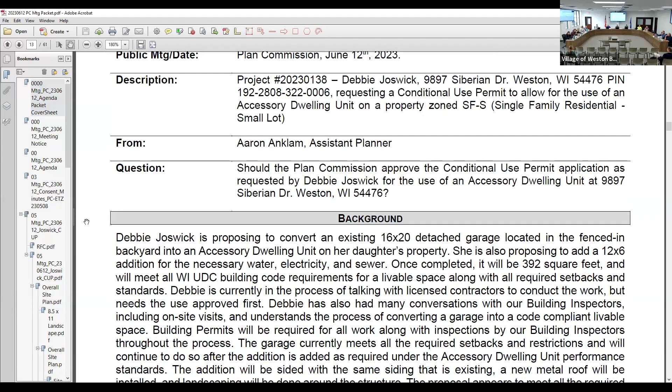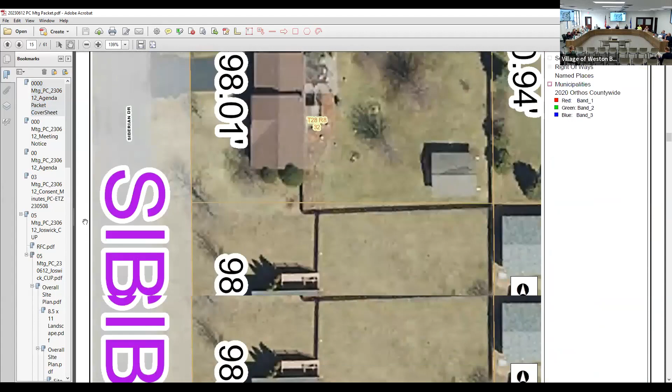I'll open the public hearing and presentation by applicant and/or staff. So Debbie's looking to convert an existing 16 by 20 detached garage. It's in the backyard of her daughter's property. There would be a 12 by 6 addition onto the front of it, which would remove the garage door. That's where the bathroom would essentially be. Debbie is here to answer any questions you may have.

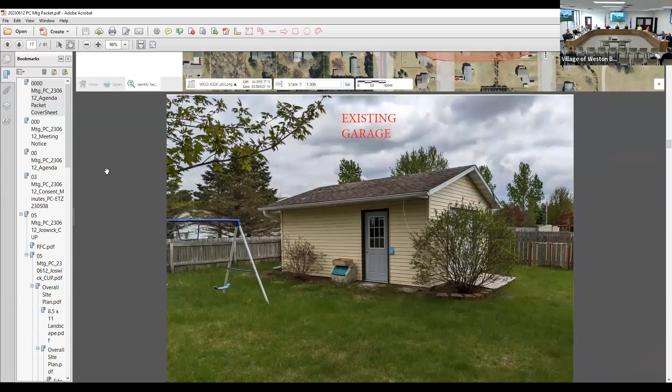Being a detached garage and it not being built to UDC standards for a livable structure, there's a lot of work that needs to go into it. She is aware of that, and she's had talks with our building inspectors and a lot of contractors regarding the work. A lot of building permits will be pulled and issued for this project, and that'll have Roman and Travis, our building inspectors, on site to ensure that the end product is indeed a UDC code compliant livable structure.

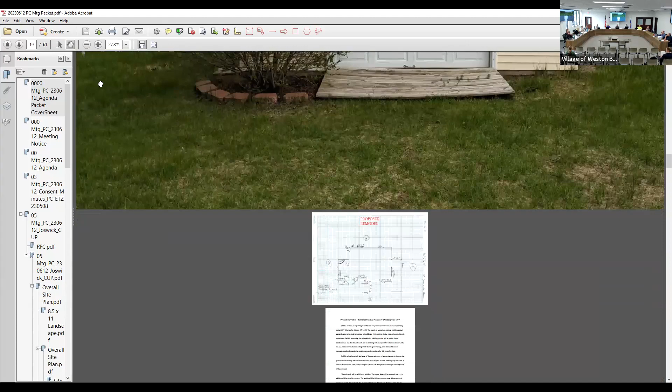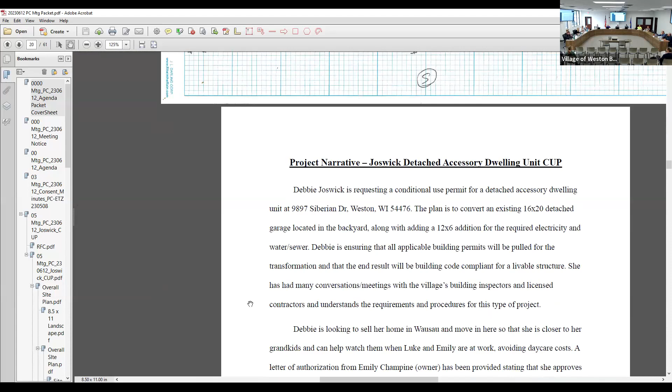She's just looking to be closer to the grandkids and help combat the cost of daycare. She is here if you have any further questions for her. Otherwise, I did include pretty much everything that was submitted in the packet, and the project narrative does go in depth about the performance standards and how it meets them. I did have Debbie answer the supplemental questions, which should also be attached in there.

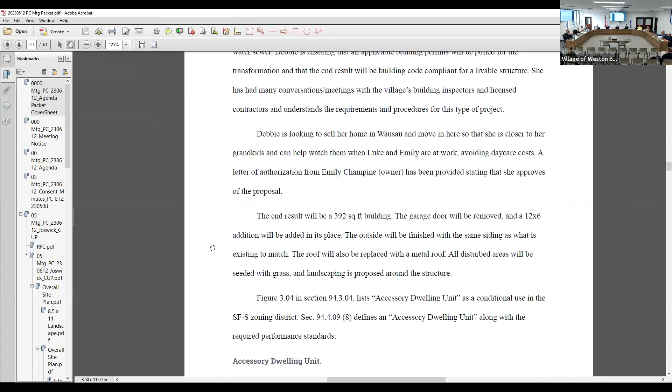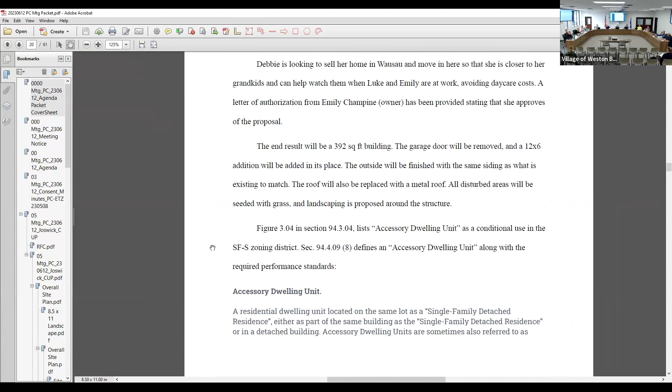Debbie, would you like to step up and add any comments to that? Just come up here with the microphone, you wouldn't mind stating your name and address?

That's okay. The one thing that I did just talk with Aaron about is on the front of the garage where the garage door was, I was going to bring a smaller roof out. But for more stability for the slab that's going in there for the bathroom, I'm going to add on to the existing roof with roof trusses so we can get adequate insulation up there also. So the drawing that I did for Aaron was a little off, but still the same footprint. It's the same thing, but it would be more structurally safe to have that come out from the roof.

And all that will be addressed when building permits are pulled. Yes, Roman and Travis will ensure that. I should also note, I didn't mention, but the current structure does meet the setbacks required by the performance standards. It needs to meet detached structure setback, so it'd be 6 feet from the rear there and 6 feet from the side, which it does, and that is shown on the site plan.

I guess I should note, I did have a neighbor reach out to me via email with some concerns, and I did carbon copy you guys in on it. So hopefully you had a chance to take a look at my responses and the questions that were brought up by Mr. Mike Murphy. And I did have one other phone call with another resident who wasn't in the same neighborhood, but he had some concerns about it becoming a future rental. That was something that Mike also brought up. So I did throw that in there as a recommended condition.

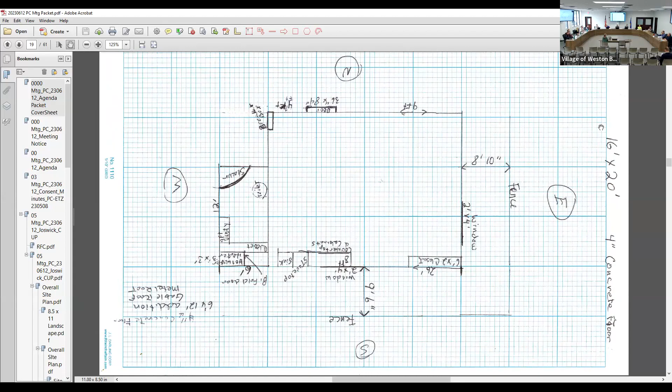Parking, I saw an overhead view. Looks like it must be an attached 2-car garage. Obviously you're probably not going to walk, right? So you've got a car somewhere that would park in the driveway? In the driveway. We have a gate that opens to the backyard. The whole backyard is fenced. It sure is, fully fenced in.

My question would come up with, you've got a slab on grade that's floating, and typically in house construction you have frost walls that eliminate any heaving or anything like that. I guess that would be a concern with bringing plumbing back there, because you've got a floating slab. That slab's going to move, so how are you going to control that? What construction are you going to do to shore that up?

So what we're going to do is actually attach that with rebar to the existing slab. And it's going to be a 10-inch deep slab, by 6 by, I believe it was 12. Roman would have the answer to that, I'm not sure off the top of my head.

You're talking about the existing slab though, right? Just the structure in general. I mean, we've got frost walls. We live in Wisconsin, stuff moves. And when you start bringing plumbing back there, whether it be water lines or sewer lines, if that slab's going to move—and all of our approaches that are pinned or slabs on frost walls down on the ground, that stuff still moves—so in my opinion, purely my opinion, if that's not some sort of frost wall or something, there's going to be a plumbing issue down the road, and it's going to happen.

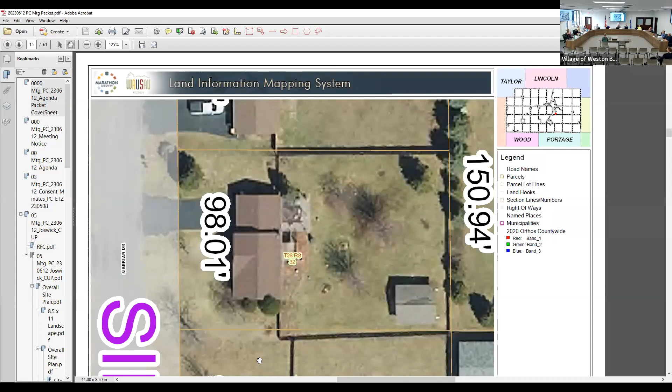I had a brief conversation with Roman here earlier today, and it does sound like this thing really does have to meet 2023 building code. So just like you're gonna build a new house, we've got to have R49 in the ceiling and R19 in the walls for insulation. You've got to have a vapor barrier under the slab.

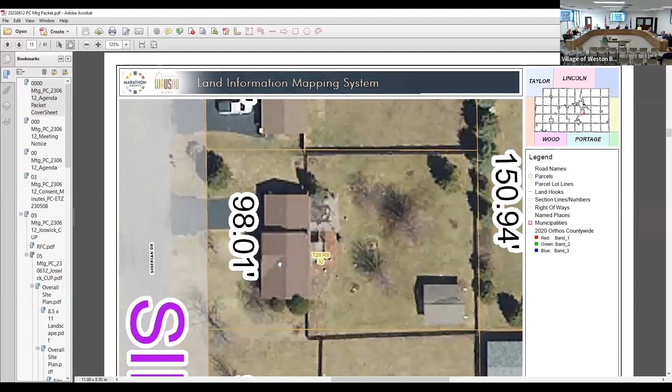And if you don't, then you've got to do a different outfit with the existing slab and changing roof lines and stuff. I just wonder if you're getting these bids and estimates to have this done, because you're not doing it yourself, right? Oh, God, no. Contracting it out. I'm getting estimates and they're all licensed, and I've already run them all through Roman, and he said, yep, that's good.

I'm just wondering if you may explore the idea—this is 392 square feet or whatever the number is—you may be more cost effective to knock this thing down and build a new one, slab on grade, or with a frost wall. If you've got to physically change everything that's there, all you're saving is 2x4s that you have to fur out to 2x6s to meet the insulation code. I don't know what you're saving by keeping that structure, but that's up to you.

That's not up to me, I'm not spending your money. But you may be more cost effective—I would explore that option. Again, the whole... I will talk to my contractor about that. That is a possibility. So again, the whole point of this is to determine if she can do it.

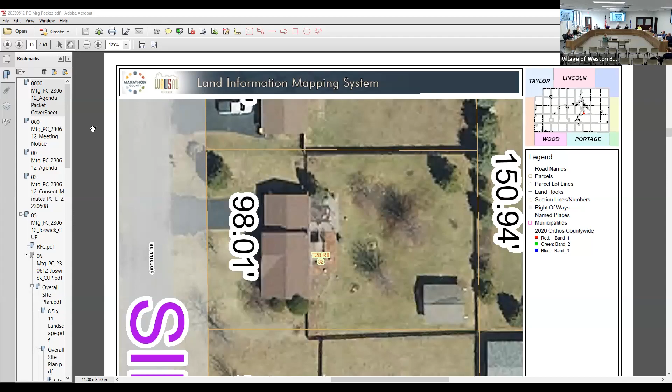And after that, correct. Yeah, it's gonna be up to our code guys or our building guys to inspect all that.

As long as it meets building code, I'm not opposed to it. I don't think there's a problem. I wouldn't want to see people living in there now—there's spiders out there.

All right, so we'll move along here. Public comment period, if nothing else for Debbie specifically. Is there anybody online or in the audience that wishes to make a comment on this? Second time, anybody online or in the audience that wishes to make a comment? Everyone can get their hand up. Nobody online or in the audience that wishes to make a comment? Hearing none, I'll close the public hearing.

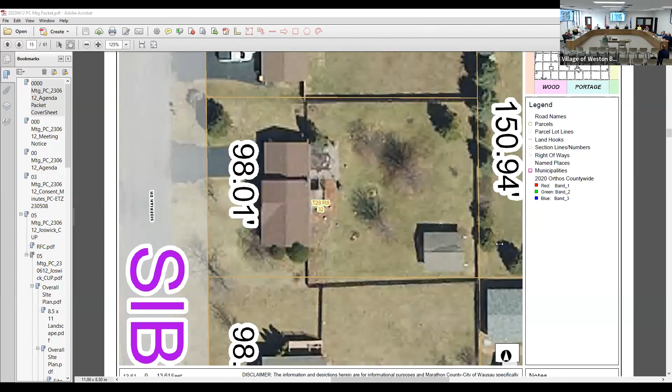Recommendation from staff. Staff recommends approval of the conditional use permit with the following conditions. Okay, and discussion and action by the plan commission. What's your pleasure? We do.

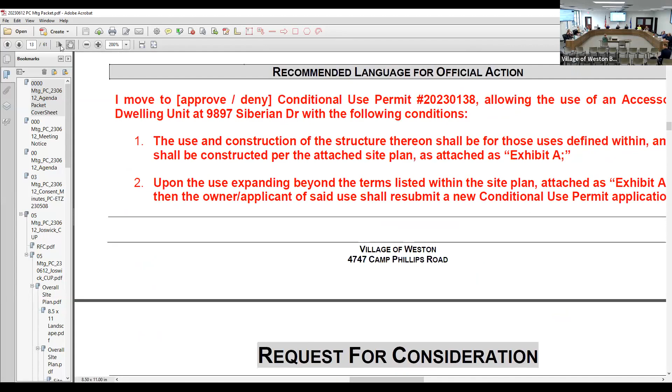I don't know if there was any further discussion that needed to take place before that, or we did move forward with that. Okay.

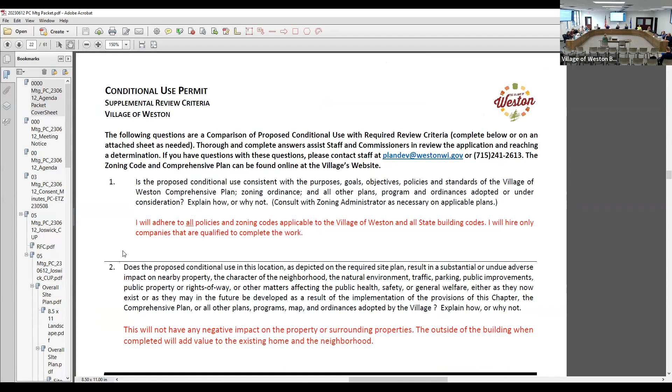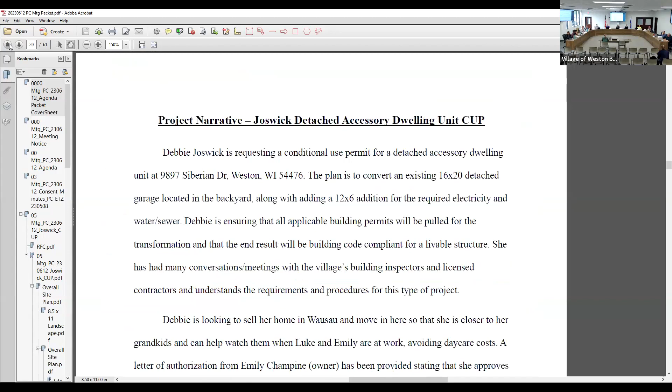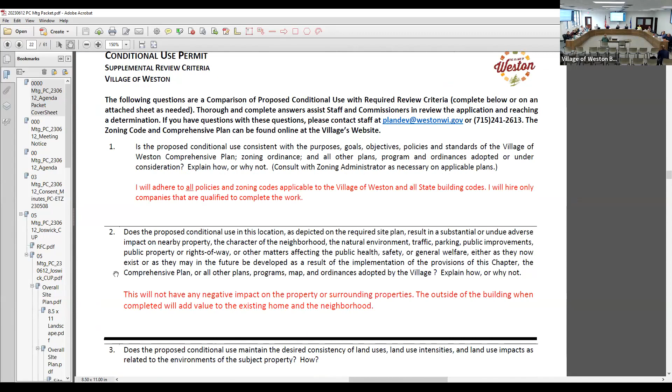Determination number 1: is the proposed conditional use consistent with the comprehensive plan, this chapter, and all other plans, programs and ordinances? Yes. Item number 2: the proposed conditional use in its proposed location and as depicted on the required site plan will not result in a substantial or undue adverse impact on nearby property, the neighborhood, environmental factors, traffic factors, parking, public improvements, public property, or rights of way, or other matters affecting the public health, safety, or general welfare, either as they now exist or as they may in the future be developed as a result of the implementation of the provisions of this chapter, the comprehensive plan, or all other plans, programs, and ordinances adopted by the village.

Yes. Does the proposed conditional use maintain the desired consistency of land uses, land use intensities, and land use impacts as related to the environs of the subject property?

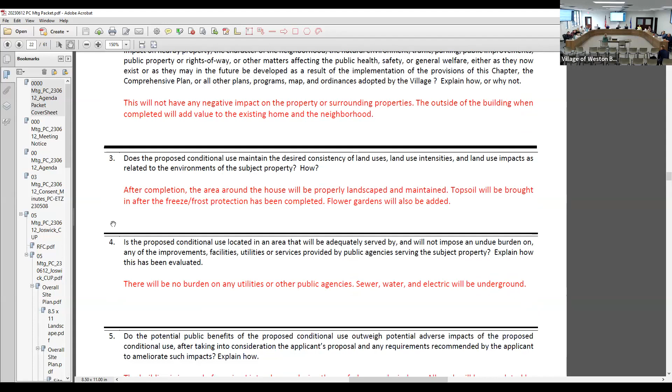Yes. Is the proposed conditional use located in an area that will be adequately served by and will not impose an undue burden on any of the improvements, facilities, utilities, or services provided by public agencies serving the subject property?

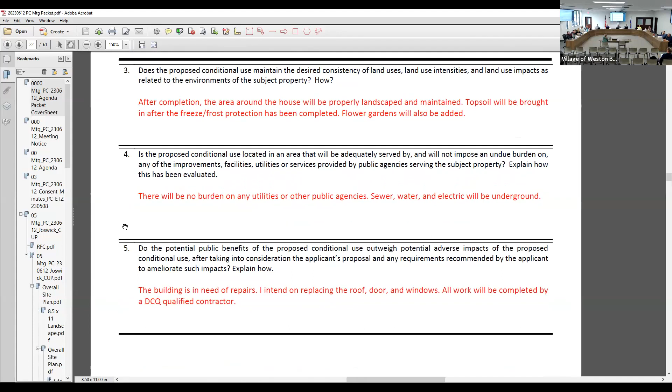Yes. Do the potential public benefits of the proposed conditional use outweigh potential adverse impacts of the proposed conditional use after taking into consideration the applicant's proposal and any requirements recommended by the applicant to ameliorate such impacts? Yes. I'll entertain a motion.

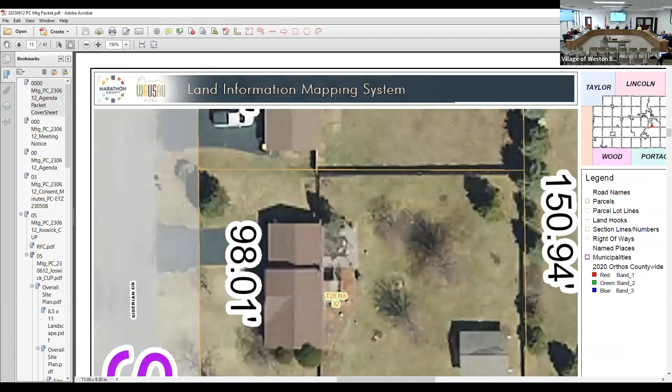I make a motion that we approve this as presented with the caveat of the staff, in particular making sure that all things are up to code and up to specs. I'll second.

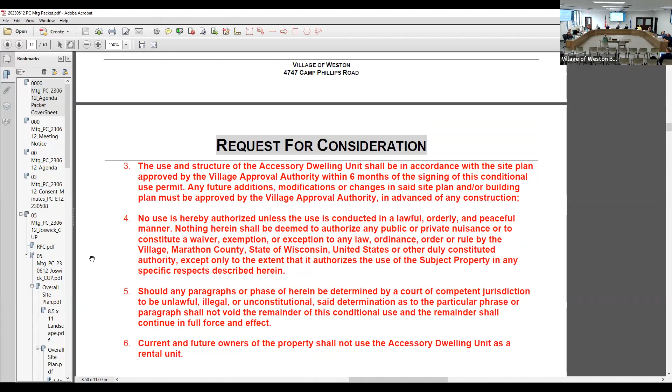There were a number of different conditions added to this. Do we want to include any of those in the motion? I recommend it to be included. Make that motion then that they be included, please.

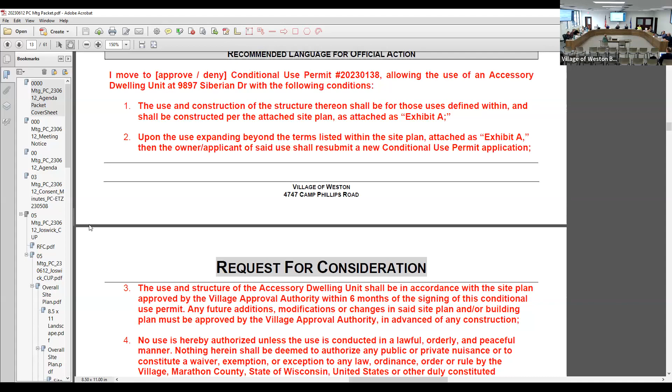Seconding the amendment. Dave, we're amending your motion. For clarification, do you want to include all of the conditions listed by staff? I think we should, yes.

Voting on the amendment, motion by Deason, second by Pincinot. All those in favor signify by saying aye. Aye. Opposed? So carried.

Now voting on the motion with the amendment. Motion made by Deason, second by Jordan. All those in favor signify by saying aye. Aye. Opposed? So carried.

Is that easy? All good to go. Let's go get some supper. All right, I will be in touch with Roman. We'll figure out the concrete thing. Thank you, Debbie.

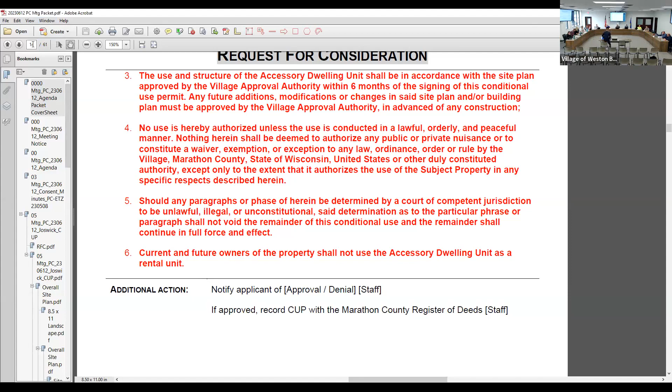Item number 6, project number 2023-0040, Project Timberwolf, 7007 County Road J. Conditional use permit request for the temporary use of a relocatable building to allow for operations while the distribution center is being constructed. I'll open the public hearing.

Presentation by applicant and or staff. Take it away. Michael's going to pull up a quick presentation with a little more detail than what you've seen in the packet, hopefully clearing up anything.

Hi, Greg Koziel, Ambrose Property Group, 888 Keystone Crossing, Indianapolis, Indiana. Here to talk to you about the conditional use permit request for early deployment operations on Project Timberwolf, located at 7007 County Road J, Weston, Wisconsin.

I wanted to talk specifically about the permitting request, the discussions we've had with staff already, and what we're trying to achieve. We'll go through the conditional use request, a summary of what we're trying to achieve, and the proposed design. It's still in flux, but right now we're just requesting use on site.

For an overview of what we've discussed in previous months, we're proposing the current development as shown here: 16.58 acres, a 79,000 square foot facility including auto, van, and trailer parking, and a private access road. That's what we're showing here on Christie Lane. It won't specifically be called Christie Lane, but it's a private access to the facility for trailer traffic.

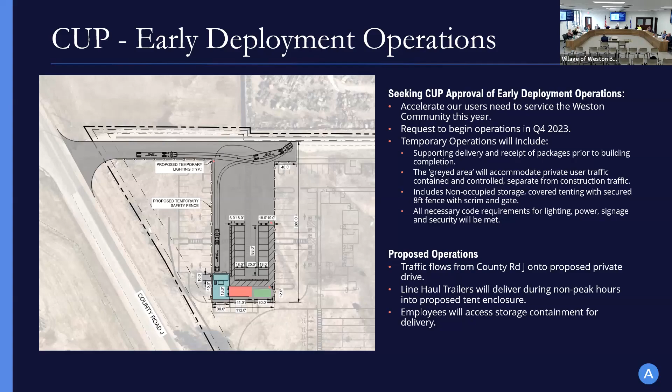On the next slide, in more detail, this shows a different view of what we're proposing. In the greyed area, the top right corner has temporary facilities for employees, storage containers just below to the right, and a tented area that backs up to the trailer line hauls—so it's a fully serviced operation with non-occupied storage, and those parking areas will be for flex delivery, all surrounded by an 8-foot fence bordered right there.

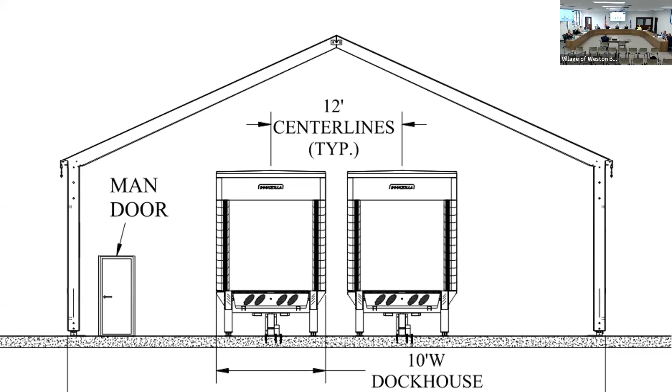This is the tented in area. I'll show on the next slide, it kind of shows an image of what this could look like. Oh, I went ahead of myself.

This is not exactly what it would look like, but very similar to what the vendor has provided in the past. You'll see a line haul backed up to a staged dock that's 4 or 5 feet off the ground, with a ladder and some conveyance coming off that.

The request today, I know we saw staff's review, and we appreciate their review ahead of time. We're asking for the temporary use permit to be in place 120 days after the building is complete. Just due to the operations of the user, it's not a seamless process. We'll want that permit in place while they get the building up and running, and then we dismantle the operations and finish the site. There's kind of an overlap there.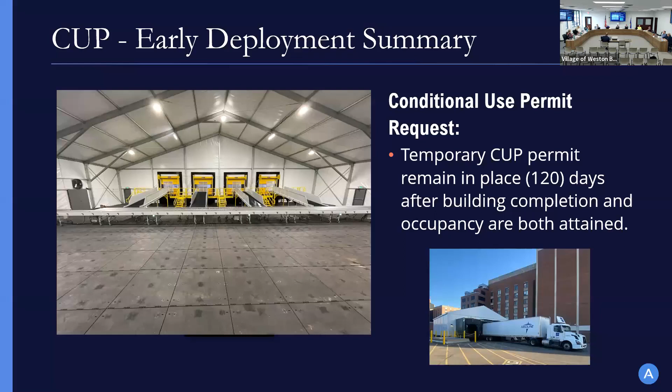Well, you kept talking about an 8-foot fence, but you really don't know where that's going to go because of the wetland DNR. Oh, happy to discuss that.

The wetlands are on the southern portion of our site, the southern and eastern portion. So that has been delineated. It has been, yeah, we got that. That was one of the things I passed out. We just got a copy of that. So...

We had Star Environmental provide the delineation on June 1st. That has been delayed just due to the spring being so cold. So we've gotten that pushed forward, and that has not really changed too much of our site plan. It may alter some of the spacing of our southern van parking, and we'll work through that and get you those details when that happens, but nothing on the north side. So wetlands, this is ideally where it's going to be placed, as it provides less conflict with the construction of our site.

And as you see, we've done a lot of utility coordination and stormwater coordination to date in those blue and green highlighted areas. This would anticipate if the main construction is hopefully completed Q4 of 24, this would be here 120 days, so until Q1 of 25, or until the beginning of Q2 of 25. The most we would ask for by the end of 24. So, I think we're trying to pull up the building completion date, but by the end of 2024, we would ask that we wouldn't need it anymore.

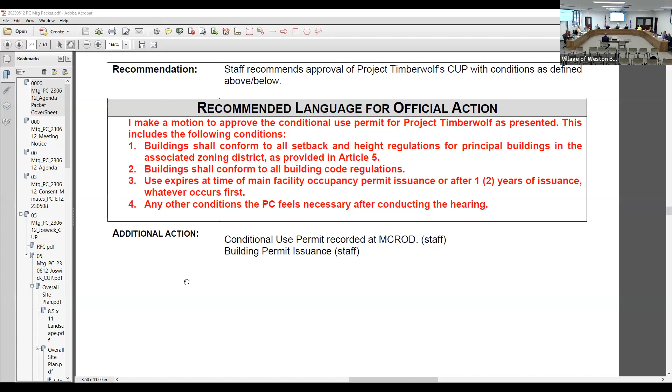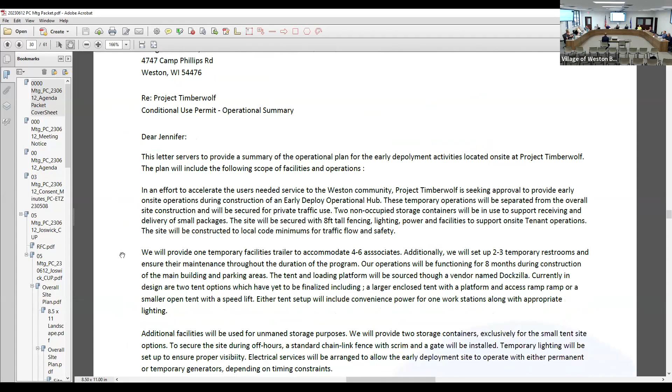It's up to you guys. For a relocatable building, we probably wouldn't have one, it would just get the temporary use permit, that's what we're gonna issue. And this isn't a standard issue tent, right? This is one of those prefab structures, it's a big structure tent.

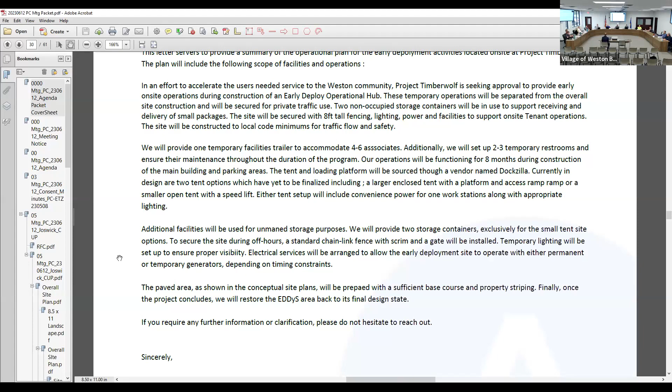It would get issued a temporary use permit and it would be tied to the conditional use permit. So your deadlines, whatever you decide to put on there. The only thing that would matter to me is a time contingency, that you do in fact follow through and get this done in a timely manner.

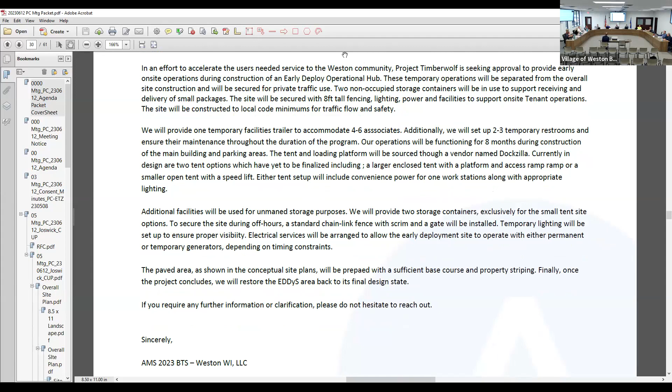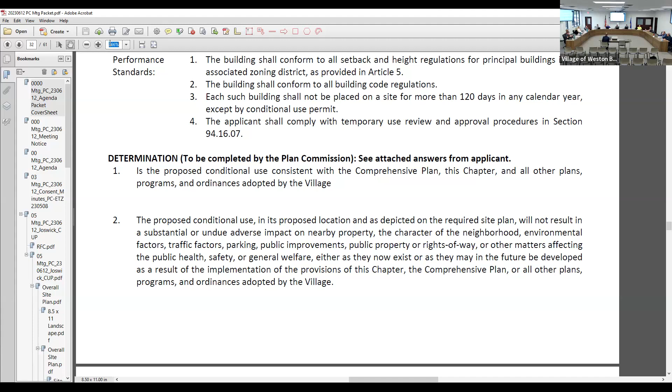Yeah, it's Ambrose's goal to get the building up and operational by 2024. That's our main goal. This temporary structure is something our users asked for, but we're gonna achieve that goal in 2024 and then get this dismantled and the building operational as soon as possible.

And if everything that you've said falls into place, you've got the final course on the parking lots and all of that lined up for when spring breaks. I think it would be somewhere in June, if not sooner. Yeah, I think mid-May would be the last few things we wrap up on the site. I'm hoping to get the building up and operational.

Stored with user packages and things like that, just for their use. So that timing is still being worked out, but as soon as asphalt plants open up, we're looking to shut that down and get the building up and operational.

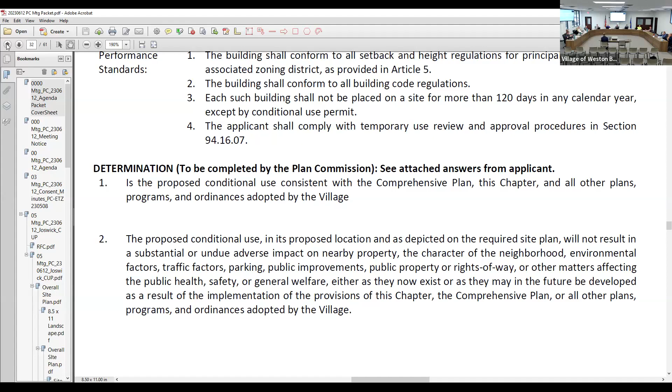Get any construction delays? Does 2 years give you adequate time to complete? That's why we have that overlap, just in case. That's what we're thinking through as we work through this. This is something new, so just having a little cushion for us, and that permit doesn't go away once we get occupancy. So we're hoping we don't run into delays, but we know it could happen.

So I have a question. If this is going to be asphalted over the area for your stormwater management, how do you propose to do that? Just to the left on the plan, if we could pull that up again, I could show it.

The blue area in the box is the stormwater area, so it's unaffected as of now. We're going to try and get everything piped in as we can. That has a lead time of 12 to 16 weeks once we get something from ADS. So we're trying to avoid the site where it's unaffected, for the early deployment.

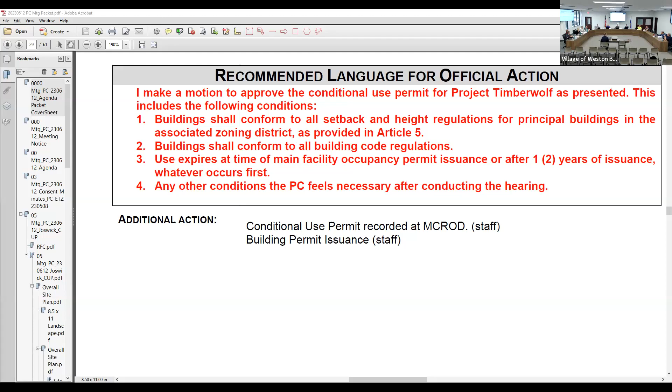So you're able to, that's what the question is—so that stormwater is between there and the road, the contact system? Yes. That'll go in before this fall. It will go in before this fall, but okay.

I think that we will, and I'll work with my contractors on this, we'll get this operational before then, or right around the same time period. If we need to, this could have a 20-week lead time, so it's just dependent on that.

Yeah, because I'm assuming that's the first thing DNR wants, the stormwater management in place before you start. Yeah, which we just received the plans today, so Michael will look at them, and then they've gone to the DNR too, so the stormwater management plans are fine.

It's just a matter of if they're able to get to the contact system before the building started, or if they have to disrupt, when your semi-traffic is going to run piping across to get to the contact system, because that's not a small task either. No, it's not. This was the attempt to do that coordination here.

So we're still working out the final design of the stormwater, which was recently done. So this is kind of the proposed area. That's something we're obviously working through—we're trying to avoid it. We need that private drive done, and we need the utilities not to conflict with that area as well. So we're out of it by November. We're not going in that red area.

Good call. Ready to do the determination? Anybody got anything else? No?

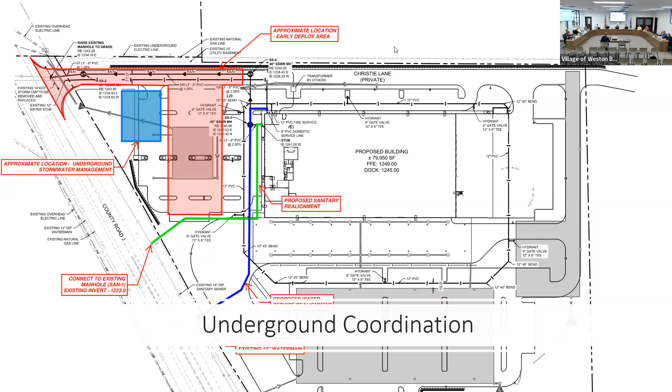All right, number one: is the proposed conditional use consistent with the comprehensive plan, this chapter, and all other plans, programs, and ordinances adopted by the village? Yes. Yes.

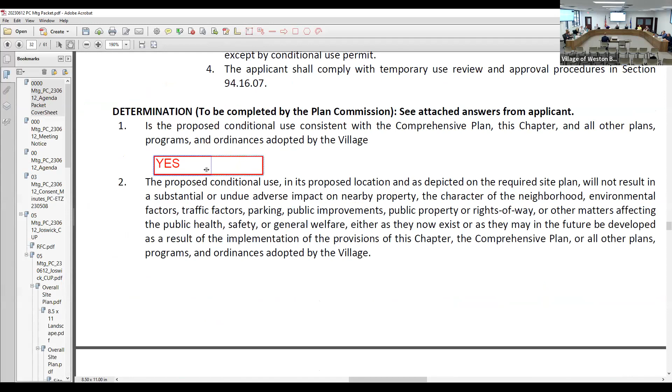The proposed conditional use in its proposed location and as depicted on the required site plan will not result in a substantial or undue adverse impact on nearby property, the character of the neighborhood, environmental factors, traffic factors, parking, public improvements, public property, or rights of way, or other matters affecting the public health, safety, or general welfare, either as they now exist or as they may in the future be developed as a result of the implementation of the provisions of this chapter, the comprehensive plan, or all other plans, programs, and ordinances adopted by the village. Yes. Yes.

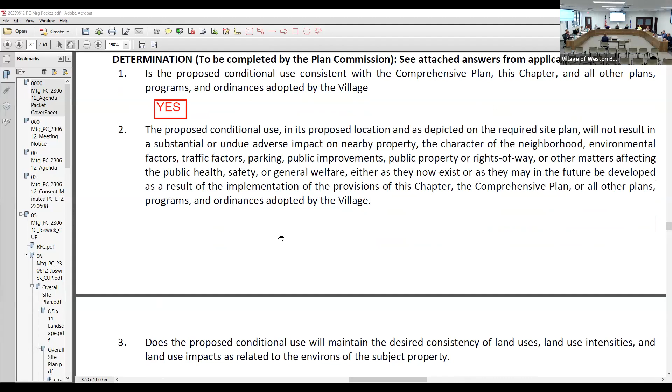Does the proposed conditional use maintain the desired consistency of land uses, land use intensities, and land use impacts as related to the environs of the subject property? Yes. Yes. Is the proposed conditional use located in an area that will be adequately served by and will not impose an undue burden on any of the improvements, facilities, utilities, or services provided by public agencies serving the subject property?

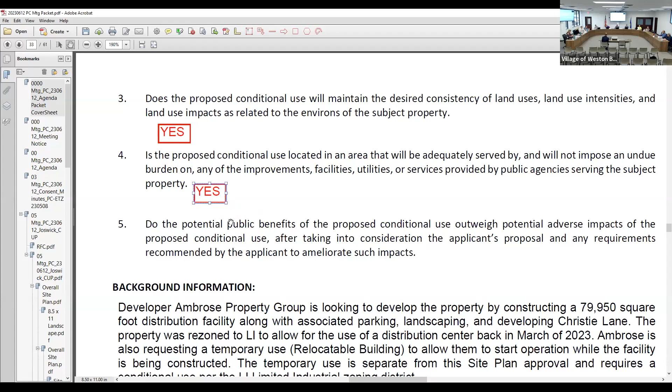Yes. Do the potential public benefits of the proposed conditional use outweigh potential adverse impacts of the proposed conditional use after taking into consideration the applicant's proposal and any requirements recommended by the applicant to ameliorate such impacts? Yes. Yes. I'll entertain a motion.

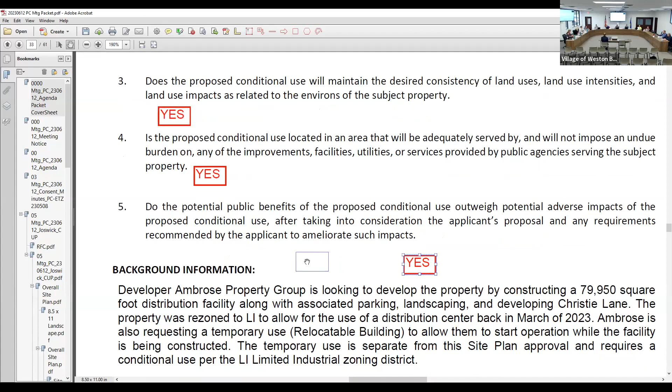I move to approve the conditional use permit for Project Timberwolf as presented, including conditions 1, 2, and 4, and a modification to condition 3 to state that it expires 120 days after main facility occupancy permit issuance.

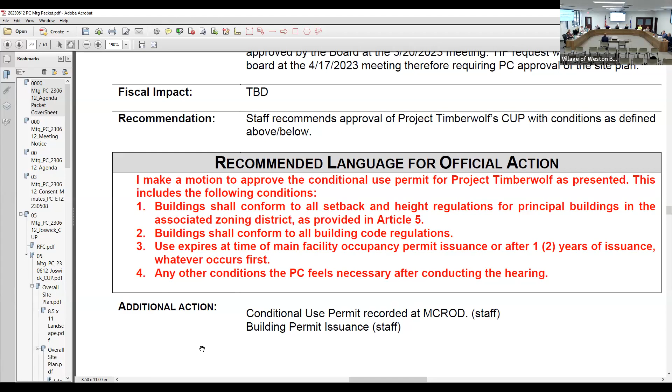Second. Motion by Mumper, second by Deason. On the question? Hearing none, all those in favor signify by saying aye. Aye. Aye. Opposed? So carried.

Was a very well worded motion. Way to go, Roy.

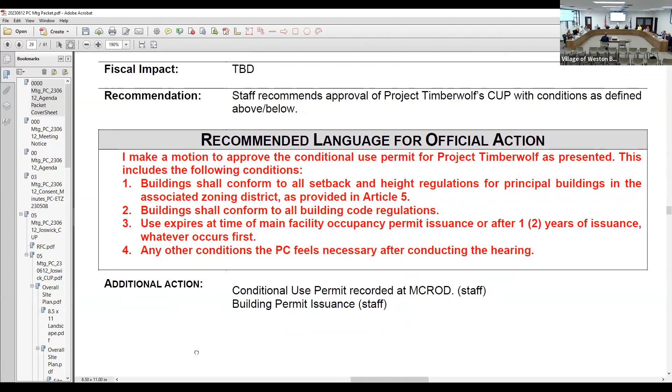Great. Thank you very much. Thank you.

Are you hanging around for the next agenda item? Okay, I'm just making sure. Did not, this one again, so, yeah. Yeah, you can stay up there if you want. The clock's still running.

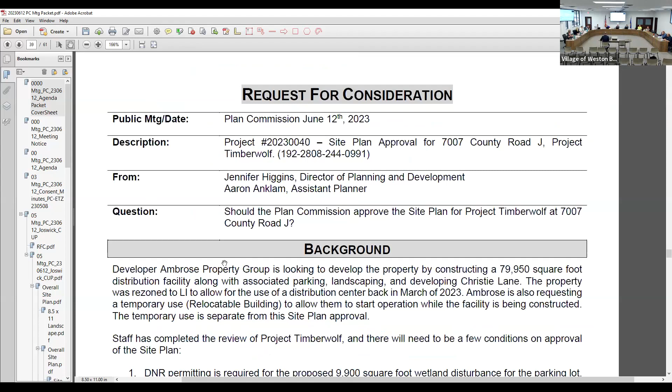Great. New business, project number 20230040, site plan approval for Project Timberwolf, 7007 County Road J, Weston, Wisconsin 54476, pin number 192-2808-244-0991.

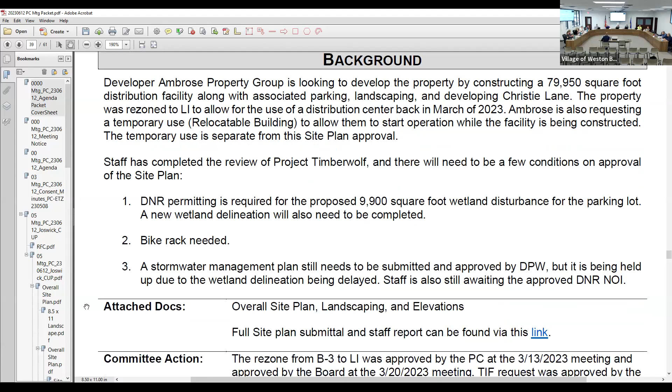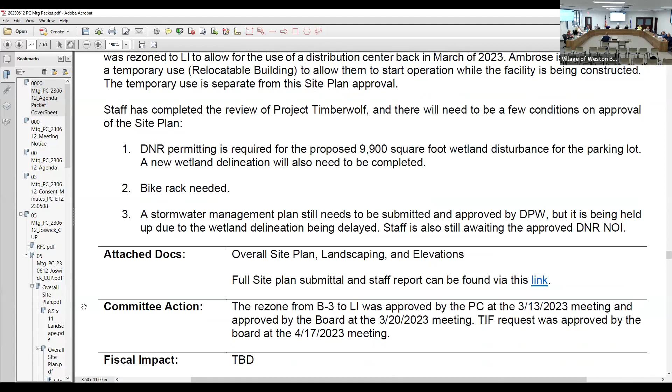So this comes to Plan Commission because the board has authorized the use of TIF assistance for this project. So you guys get to review, and you're the site plan approval authority. There are a few items still hanging out there, but we wanted to get it in front of you because for the main part it's your overall look of the building, site layout, things like that. We don't think a whole lot of it's gonna change except maybe a little bit of the parking area, like Greg said, due to the wetlands and any remediation they may have to take.

We could bring that back later. We just didn't want to hold up the project and wanted to get it in front of you because we had the majority of it basically fleshed out as staff.

So there were a few items still hanging out there that we've actually received since then. I did give you a copy of the document. We did get the wetland delineation, and in there was a document from the DNR stating that they basically had approvals to move forward at the village level, but they still needed to go through their permitting. So they will still have to do the permitting with the DNR for the project.

One thing we should probably discuss is the need for a bike rack. The code requires it. I don't think they need as many as the code would require, so I'm just suggesting they have something for somebody to ride there. Maybe one or two.

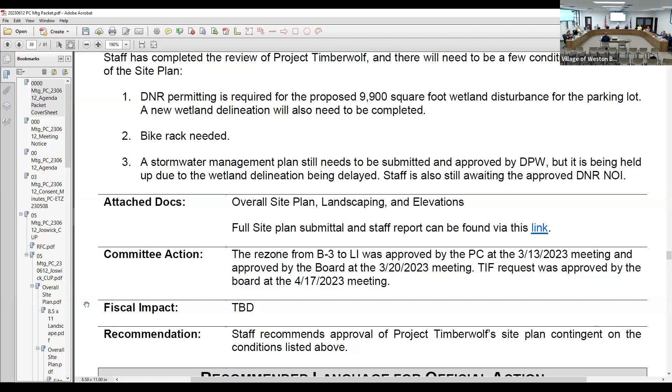At the time that I wrote this, we did not have the stormwater management plan yet. That did come in today. And then we would still need the NOI from the DNR when they get that. What was that last one? It's a notice of intent - it's the DNR's approval of their stormwater plan. Michael has not seen it, I just got it this afternoon, so he'll have to review that.

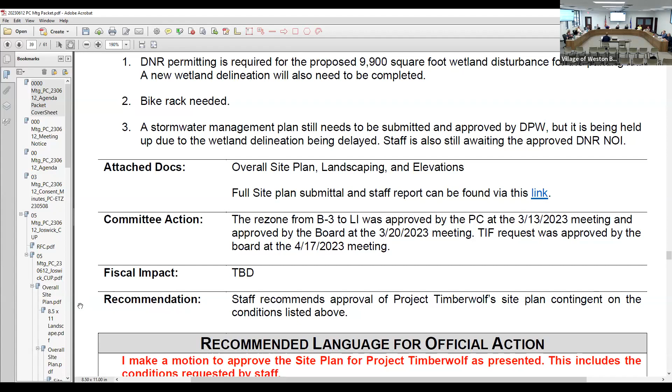But if you want to flip through the building elevations, basically the site meets setbacks.

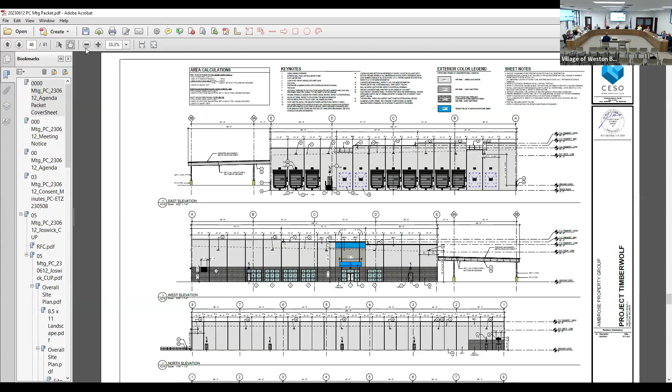The parking, we could probably talk about that a little bit. It meets the needs for the amount of employees they have, but because of the amount of vans they're using, there is a lot of parking on there. But we as staff looked at it as basically that's more or less their yard, a storage yard. It's no different than Lake Sutton Transport or Crystal Finishing and their use of semi-trailers at their site.

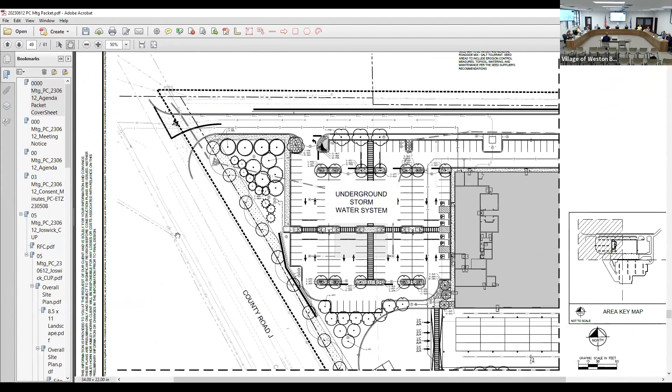I don't know if you guys have any questions, but I did give you a link that has very detailed plans. It's probably the best plans I've ever seen in my 20 years here. Wait till you see the building.

When you said bike racks, you said we probably have more - so the way the code reads is you have to have so many bike racks per parking stalls, so it would require quite a few within the parking stalls. What did staff have, like a number?

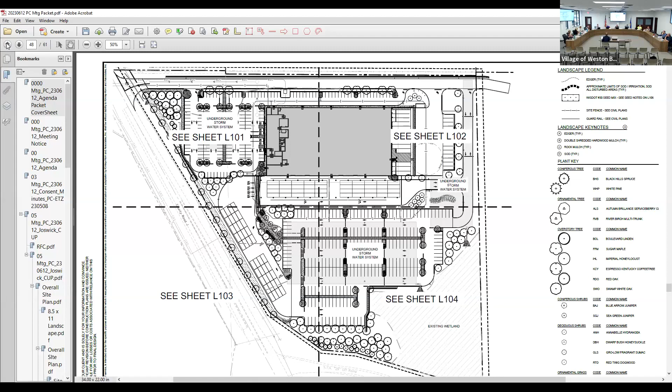How many bike racks - when you say one or two, how many bikes hold in a rack? I don't even know. That's what you buy, you can buy one for one, or one for a hundred, depends what it is. They're usually U-shaped, like we've got one out here. So it depends how they set it up.

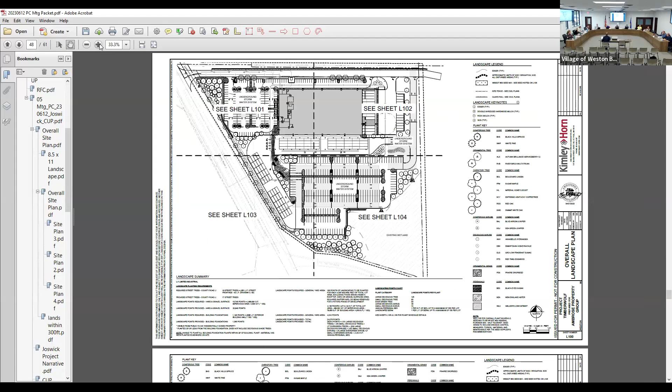Did you have a number of how many bike racks you think you're gonna need? No, but we're happy to accommodate local code. Yeah, I didn't make him change the site plan just for that, so I thought we could discuss here. We'll determine the placement that makes the most sense, but that's no problem at all.

Where's your snow storage area? Is that listed on here? Don't have it listed on there, no. Would you like it listed on the site plan? Yeah, is that a requirement for you? Yeah, we typically think in this case it's usually trucked off when we see landscape plans like this. We can add that. Yeah, if you could.

Expensive to truck it off. That's a lot of snow to move. That's a lot of snow.

Islands plow around—your anticipation to likely have all of these stalls filled, or would there be space in this parking lot to store snow? Likely in the auto parking, there will be adequate area. That's on the northern end. So while we show about 170 autos, I think there's going to be an area that will be used for snow.

On the southern area, due to the wetland impact or wetland delineation, we changed that slightly and shortened it up a little bit, highlighted right there. So we're getting rid of some of those islands to accommodate more parking and shortening up the site. The van parking stays the same, 234 on the southern end, but we get rid of some of those landscape islands and still meet the adequate code for landscaping.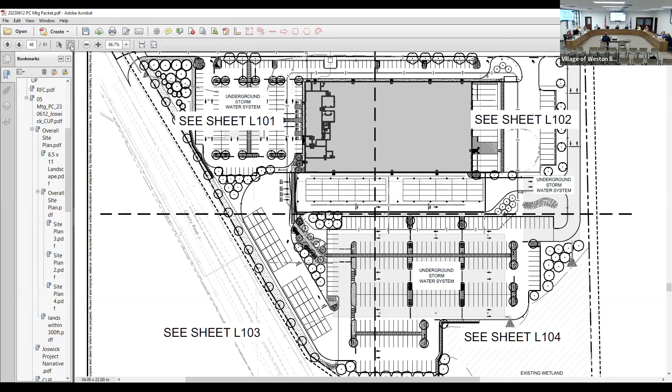All right, what's your pleasure? Anybody got anything further? I would make a motion to approve the site plan as presented with the following changes: allow the bicycle rack, add a bike rack and let the number of bicycle racks be determined by staff and the applicant. We will allow the applicant to remove any islands in the parking area as they see fit, just moving that landscaping to the outboard side of the parking lot to meet the points. Allow an exemption for parking additional over the 125% the code shows. There are no signs shown - I know this is a confidential project, but allow signage as long as it meets the code and staff approves of it.

It's 5% of the parking. So 5% of the number of stalls is what bike parking is. Asking that, you were asking that, weren't you? 5% of 400. Anything in your motion about snow storage?

Motion, second. Okay, so we have a motion by Pincinel, second by Jordan. On the question? Hearing none, all those in favor signify by saying aye. Aye. Opposed? So carried.

Thank you. Thank you very much. Total parking on this thing, Jeff? Good job, everybody. 430. Thanks, Mark. Thank you. 433.

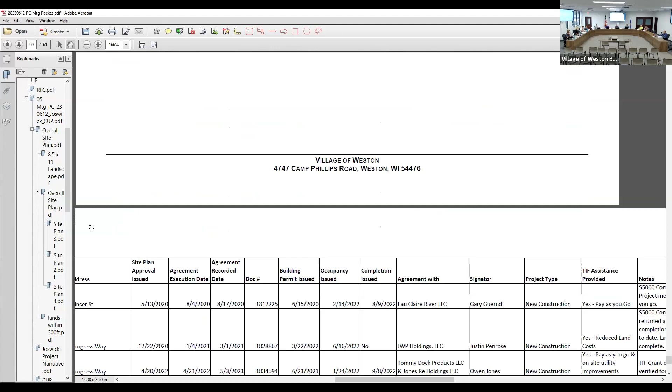So the one I handed out is updated as of a few hours ago. I'll change it again tomorrow. This will be the one I'll put in the board packet, so it should have everything up to date. I sat down with Roman and talked to Jessica today about some of the TIF, the ones from 2022, just to find out where they were at and where she was at with the reimbursement.

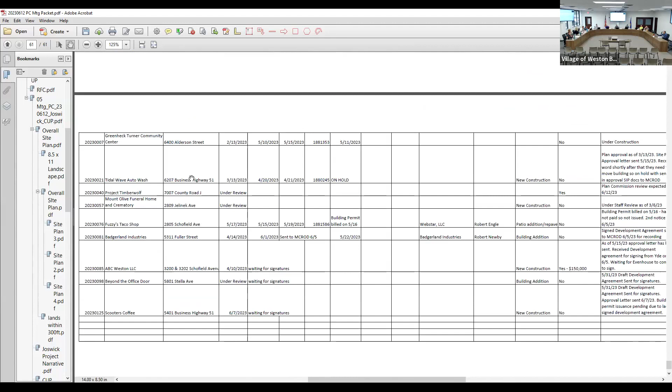That shows you kind of where we are at with all the projects past the new ones coming in. I'm also rolling into that project updates. This is basically for the new ones, just an update of what I gave you last month. So this is kind of where we're at with all the projects currently working on or that are going to come to you. There's the same projects on both. We can go over the memorandum one. I just don't know if you want to look at this one later.

All right, motion by Pincinel, second by Deason. On the question. Hearing none, all those in favor signify by saying aye. Aye, opposed? So carried. Jen, I do have one quick question.

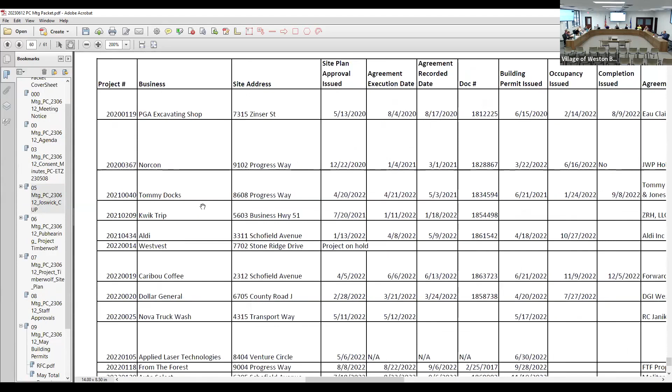With storage units, what's the status on those, on Ryan Street? Is that the Wiesman ones, or is that something different? Oh no, that's Transport Way. The Ryan Street ones were Jeff Novak's. That's right, yeah, so that is also on there. Have they had anything done over there yet? No, because he has not signed the development agreement.

I just had Mark sign the stormwater agreement today. So we're slowly getting there, they don't have their stormwater approved, I think we just got the NOI from the state on Friday or something. So that's all updated in here. I thought we had a timeline. They do have a timeline, yeah. But I sent the development agreement from what I have in here. He has not gotten it back to me, so I'm going to have to reach out again. I reached out last week saying I was still waiting for these, because I haven't given them the approval letter yet, just because I was waiting for this from them. And I still haven't received a signed copy, so.

And Roman is not issuing any building permits until we get at least the signed one from the applicant. Some of them you're going to see on there that I have to have, I didn't know Mark was going to be here today. So there's a few that Mark has to sign and Pam, and then I'll send them for recording. But once we get their signatures on them, then I'm moving them over to Roman, so he can get right with them. To your point, if he's got a deadline of some of this stuff by September or November, he's not going to make it anyway. That's where I was going with that. Right, I'm not shocked, to be honest.

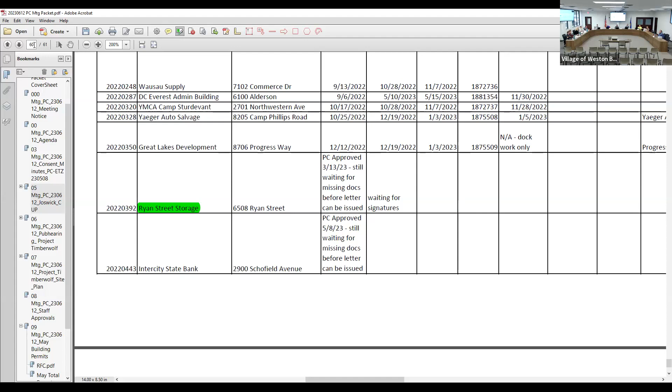I am going to forward an email that Roman gave us, part of the UDC, or actually the ADU discussion, that he found over the weekend. It was an interesting article, and I think we're going to start seeing more and more of those.

They're talking about how millennials can't afford housing right now, so in other states they're basically living in their parents' backyards. If you move out of mom's basement and into the garage, or a small backyard unit, you can put a bathroom in it.

I think we may see more of that coming, either for elderly parents who don't necessarily want to be in somebody's house. Kids today just don't have the same work ethic. There is no work ethic.

Some of it is, we're probably okay here, but I know other housing markets there's either no housing and they can't get into anything, or it's too expensive. I know my daughter's going to have quite hefty loans coming out of grad school to be a nurse.

So we'll see, but that'll be a discussion topic because we have to look at the housing element of the comp plan.

Other than that, we basically went through and I updated all the different projects within TIF 1, TIF 2, and just outside of the TIF.